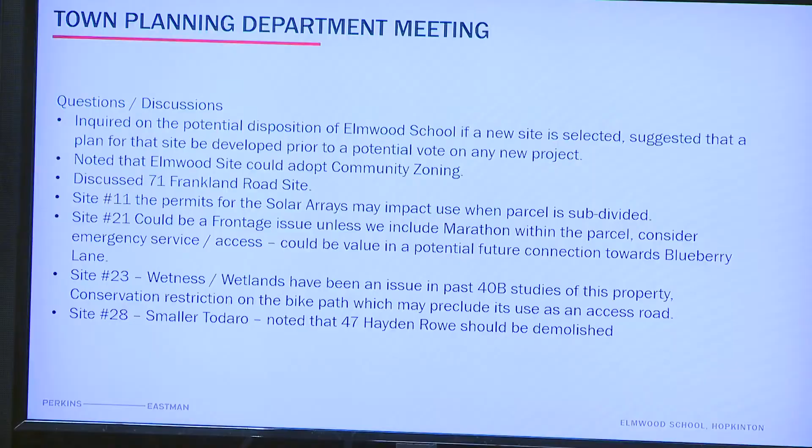Solar and sustainability, you can see efficiency and environment were the leaders in that particular exercise. That was really great feedback. I think it was well done, and we hope to continue that discussion as we move forward.

We also met with town planning.

Dan, sorry, before we move on. Sure, I just want to give the rest of the committee an opportunity if anybody has any comments or thoughts on what Dan just presented, or on the community forum in general, for those who were able to attend or view it.

Yeah, I'm curious, do we know how many people watched afterward or were viewing at the time? I think the number we got for viewing live was about 30. I don't think we have the numbers yet on how many have watched it subsequent to that.

I don't know, we probably have to ask our friends at HCAM if that's data we can easily pull, but that's certainly something we'll want to take a look at. That's a good point. There was also another 30 or so people in the audience too, beyond the group here. Thanks.

I think it raises a question probably worth considering, which is 60 is an improvement from our community kickoff, but certainly still not high engagement numbers. So I would also ask members of the committee if, A, we think there's anything we should be doing that we're not doing that could increase that engagement, or do we potentially think this is just where the community is at this point and hasn't really connected to this project yet. We're always concerned about keeping the community engaged, but short of going to people's doors and providing them the information, I'm not sure if there's anything else we should be doing here.

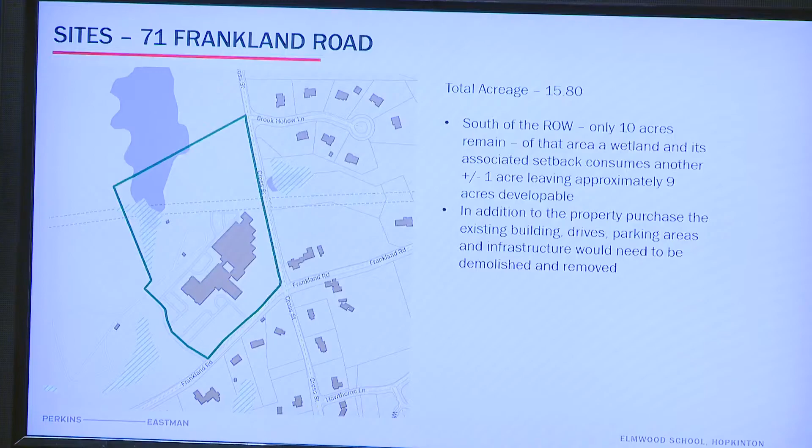In addition, the other condition on this property is that after a purchase, the existing buildings, drives, and all the infrastructure would have to be removed at an additional cost above and beyond the purchase of the property itself.

So that's just a rundown of this piece of property and at least what we see from it right off the bat. Any questions on that, or on the town planning department meeting?

For context, the town planning department meeting was one that Mr. Kamalo asked us to have. The general purpose is just to make sure we have ongoing communication with the various members of the town planning department, the conservation department, and DPW, to make sure they're brought along in the process. So it was good to make those connections.

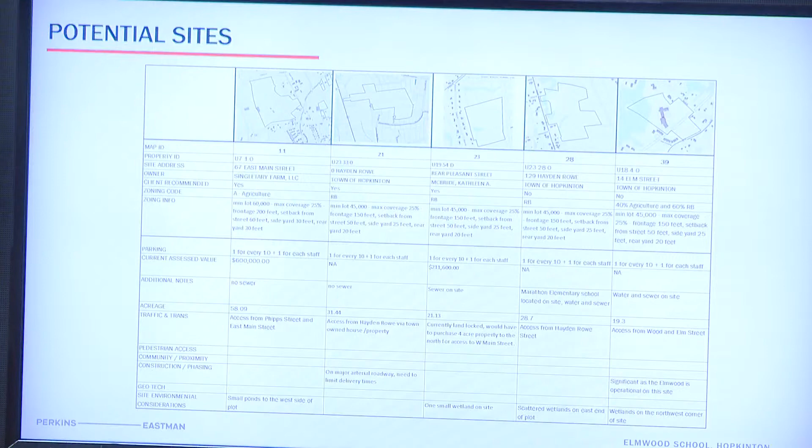Sure. You're all familiar with this slide, showing where those sites are located within the community, the ones remaining, the 5 that remain, and here are those 5. Again, to remind everybody: the 67 East Main, the Hayden Rowe sites, the rear Pleasant Street site, and the Elmwood site.

I guess we're skipping this for now, right? Yeah, these are just recaps from our last meeting, and also the community forum where we presented the criteria to you and to the public, and then the idea of putting it into a matrix here. But yeah, we can come back to this as well.

So I can start with each one of the test fits. We have to start with a program, and the program will evolve throughout the feasibility study, through the 2 initial submissions to the MSBA. So what we've done here is list, in very simple form, the existing gross square footage, as well as, using the MSBA's template, the gross square footage of a grade 2-3 school with projected enrollments, and for a grade 2-3-4 school.

We did the same exercise for site program. We had some initial meetings with staff, facilities, and PE health and wellness instructors to put together what would be the initial targets for parking, car queue, bus queue, and play space. It's not an exact science, but basically we needed to start with a comparable program, keeping it consistent, to create the options and vet them.

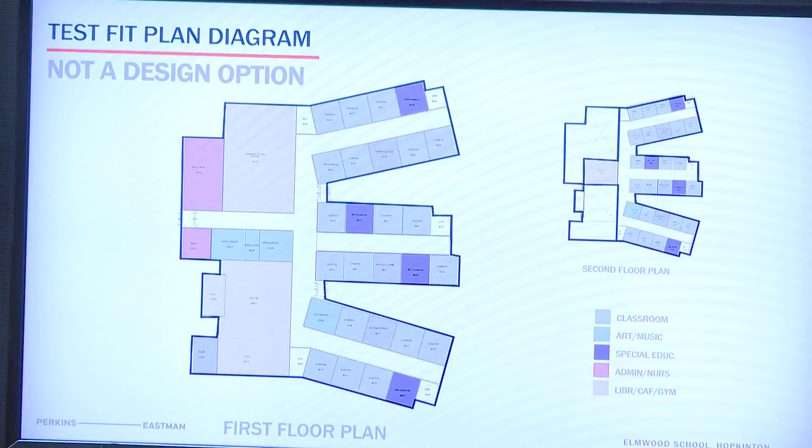So in this plan you're looking at, you'll see it's used for both the grade 2-3 and the grade 2-3-4 option. The difference would be, for the sake of testing, it would be a 2-story plan for the grade 2-3, and then an additional 3rd floor would be added for the grade 2-3-4. You'll also see on the test fit site plans that some of the major spaces at the ground level, the gymnasium and cafeteria, would also get a bit larger. But for the most part, it's pretty much a very similar diagram.

So I think we can go into those test fits. You've seen all these before, but there's a couple of things we did from the last iteration to this one. One was decoupling them, so now there are separate versions of the 2-3 and the 2-3-4, so you can start to see the differences in the parking area and the other areas around the building and how that affects it, rather than seeing the max size like before.

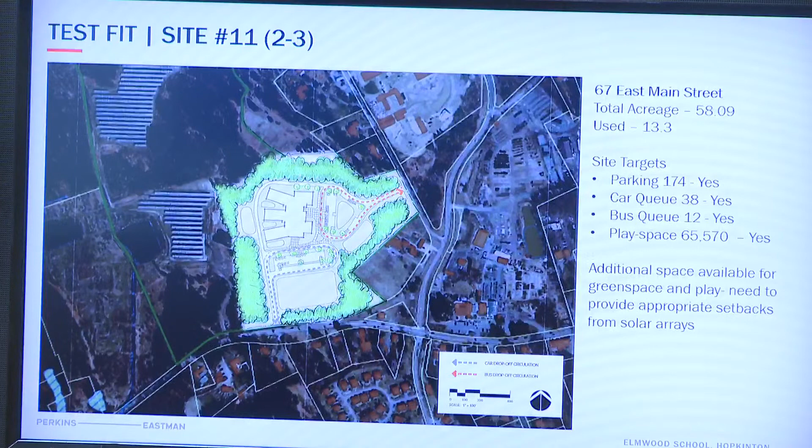The other things we've added are the drop-off for the cars and the drop-off for the buses, so you can see how we envision those happening on each one of the sites at this point during a test fit. So this is the 67 East Main, the 2-3 version.

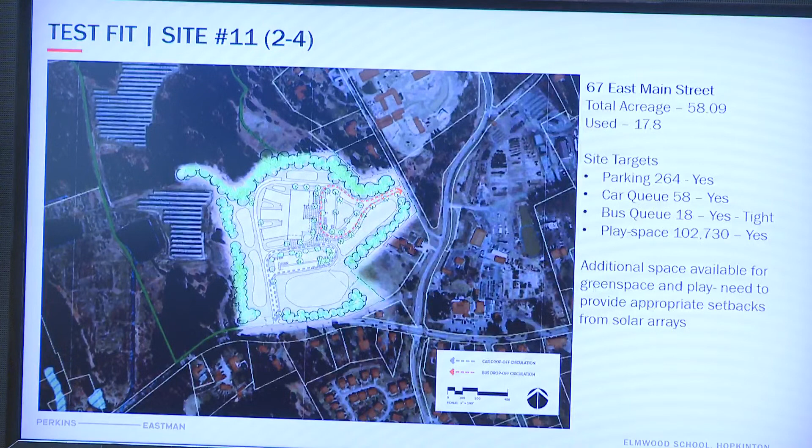It meets all the criteria, total acreage of 58.09. We're using 13.3, so it does meet all the criteria for a 2-3. It also meets all the criteria for a 2-4 configuration, using more acreage, going from 13.3 to 17.8.

There may be additional space, but we have to provide appropriate setbacks from the solar arrays and any other issues that come along with the solar arrays.

John, did you want to inform the committee about the outreach that's been done so far? So, yeah, I would defer to Mr. Shepherd, because I know you did some of the outreach to the property owners of the sites under consideration that are privately owned. So if you want to provide.

This particular site belongs to Mrs. Mezet. I talked to her probably last Thursday just to make her aware that we were considering or looking at the site. This is part of the former Weston Nurseries project and belonged to one of the two brothers. They subdivided the site for the solar array, as you can see, probably 2 or 3 years ago. She's groomed this particular site. If you look at it from 135, it looks like Weston Nurseries. The grass is cut, everything is perfect. I'm not so sure she'd be really amenable to letting it go, but I wanted to let her know we were talking about it, and she thanked me. I told her that should we go any further, if anybody wants to walk the site, we'd talk to her first, and she was fine.

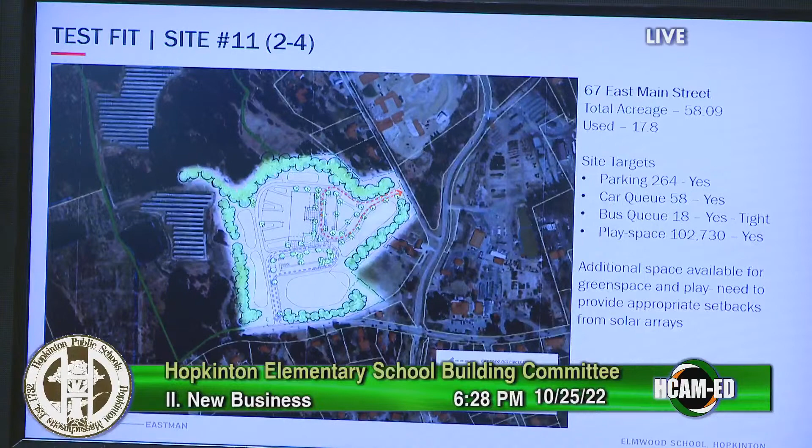In terms of the others, I also reached out to the lady that owns the site down on West Main Street. She owns that considerable piece of acreage behind Whalen Road, and also a lot that goes out to West Main Street, which we use for access. I told her again that we were looking at it, and she volunteered that she had a local surveyor looking at it for potential subdivision. She just wanted to let me know. I told her the same thing, that we'd keep in touch with her if it looked like something we wanted to do. There's a considerable amount of wetland on that site, as you probably found out.

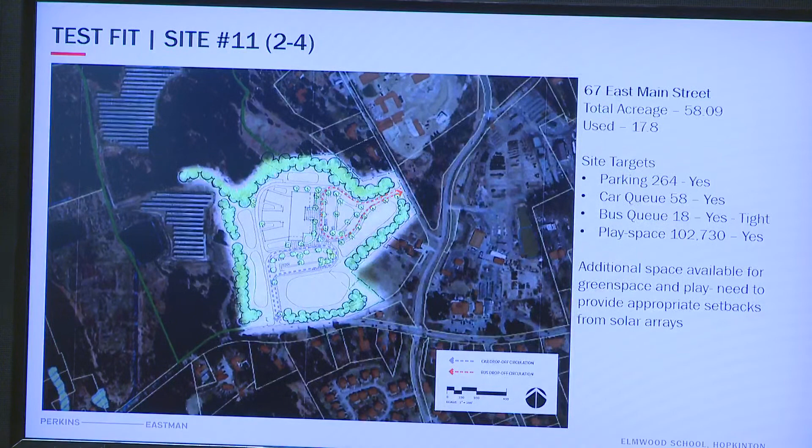But then the other two I spoke with, because we talked about it briefly, were the two private property owners on Elm Street and Wood Street on the corner. Mrs. Richardson has the big old farmhouse you can see when you turn the corner, and the gentleman just put up that nice new white fence, and he said, 'Does that mean I gotta get rid of my white fence now?' I said, 'No, it just means we're talking about the possibility. Don't be alarmed.' Both of them took it the same way. They were very gracious, and they wanted to make sure we kept them informed. That was pretty much it. A couple of them were harder to get to than others, but somehow we managed.

Thank you. Any questions about that?

Did anyone show unwillingness from the beginning? No, wasn't anything like that. I told her we were a long way from having that discussion. I offered that the town does own land because they're paying for it in their taxes up on Hayden Rowe Street, and they said, 'Yep, I'm aware of that, where the Marathon School is.' And this is just one of the options we're looking at. None of them said, 'Don't bother me, don't call again.' That's something, that's good. Mike, you're the perfect person for that job, by the way. I don't know if it fell on your shoulders on purpose or on accident, but whatever it is, you're perfect for it. But no, it went fine.

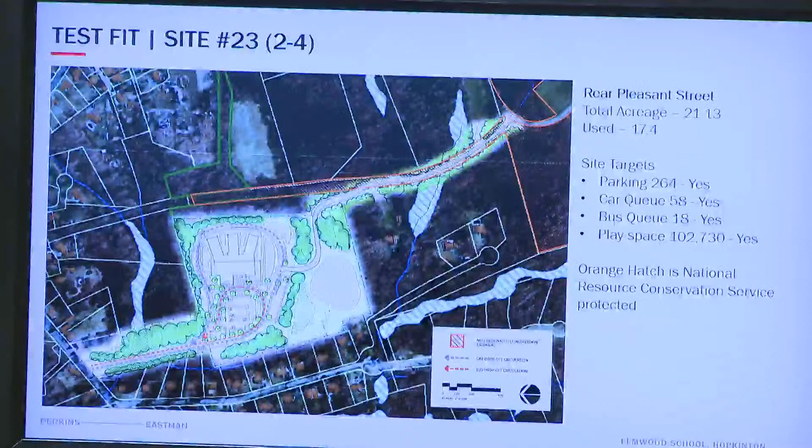And in this case, correct me if I'm wrong, but on the one side it's hitting West Main Street, right? Bottom of West Main Street, right near before the light. Whalen Road, no light, Whalen Road's on the left. That's these houses right here. This is the bottom of West Main Street. And she owns this big acreage, but she also owns this frontage lot that comes out to West Main Street. So that's how it could be accessed.

Another disadvantage, I think, would be that it fronts like 17 single-family homes, so you've got 17 enemies already to start with. Unless they have kids going there, then it's easy for them to walk. I was more considering on the map where it seems like it's very close to the 135 turnoff. Yeah, it is, it's close, at the bottom of the hill. When you start talking about early morning traffic, that's going to delay considerably kids being able to come in and out of the space.

In this updated test fit, do we meet the play target? Originally we did not meet the play target space that we wanted in the first test fit. It does meet it now, okay. It just has these other issues.

It meets it with having to cross the wetlands. Right, and what would that mean, literally? Would there be a path or a bridge? I haven't walked the site, I don't know how wet this site is. There could be a bridge that would need to be built over it in order to cross it; oftentimes conservation commissions do require you to build a bridge with limited pilings or touches.

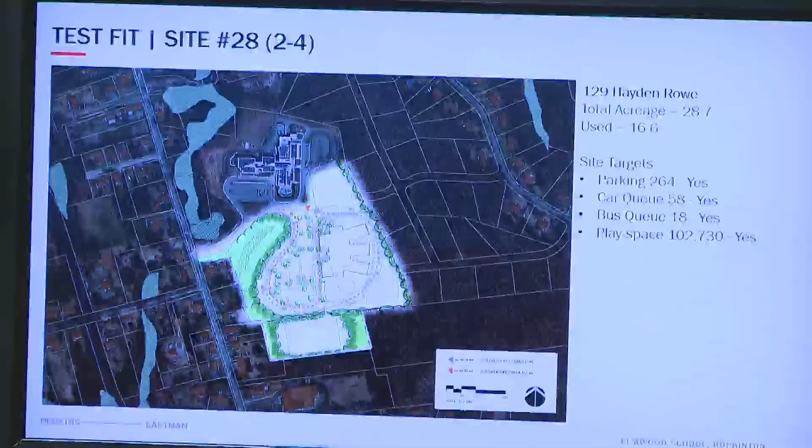So the sort of advantage, if you will, which I'm not sure is a positive or negative, to that one is the town retains more of that zero Hayden Rowe land to potentially use for something else. The downside, as you're pointing out, is it potentially restricts anything that happens between those two schools from a growth perspective. Could I add, though, we're using 16 of the 28 acre available acreage on this lot.

So the remaining 12 acres or whatever it is, roughly, is still town-owned land. So if we needed to expand for field space or playground space, we wouldn't be stealing from Marathon necessarily because we do have 12 more acres potentially to work with, or am I wrong about that?

129 is Marathon, correct me if I'm wrong. Yes, that's correct. So this is using the remaining acreage of that whole lot. 129 Hayden Rowe is Marathon now plus Elmwood, with 28 total available acreage, including what Marathon already sits on. Correct.

But in terms of town-owned land, how much of zero Hayden Rowe does this use? Because you said you're jutting into that one field. It's only using about 3 acres at the bottom of that field. So 3 acres, and leaving how much on zero Hayden Rowe?

I'd have to go back to the total available. Is that what you're worried about? We still have something left. Total acreage 28-ish, about 28 acres left if you use about 3. Now, the difference, I'll just say...

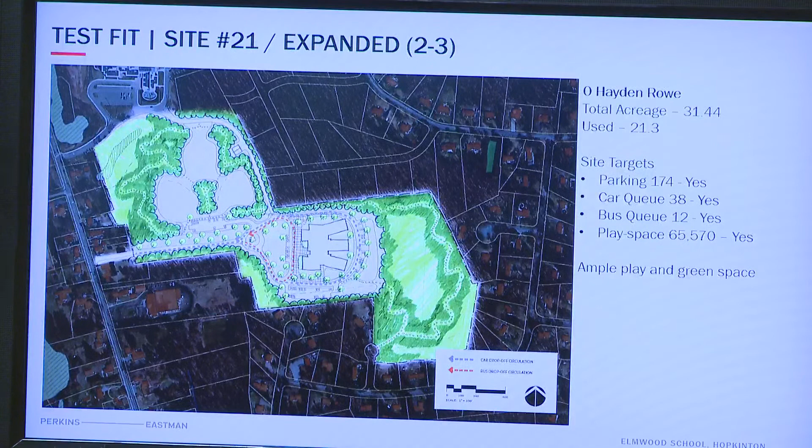No, I think this is excellent feedback, the design team can work through. As Dan noted, we're starting to eliminate the idea of the parcel separation. I think there's an ability for a modified version of this option to float the proposed site further away from Marathon to preserve that. The fields could be spaced closer to Marathon, for example. It's almost like a hybrid of this idea, using more of the space.

Would it make sense in any further design where you'd have mixed use of fields for both schools, putting fields in between them instead of south of the potential new school? Was that looked at? That is what's happening on this expanded version. Those three items there are multi-use fields between the two schools. That was the idea here.

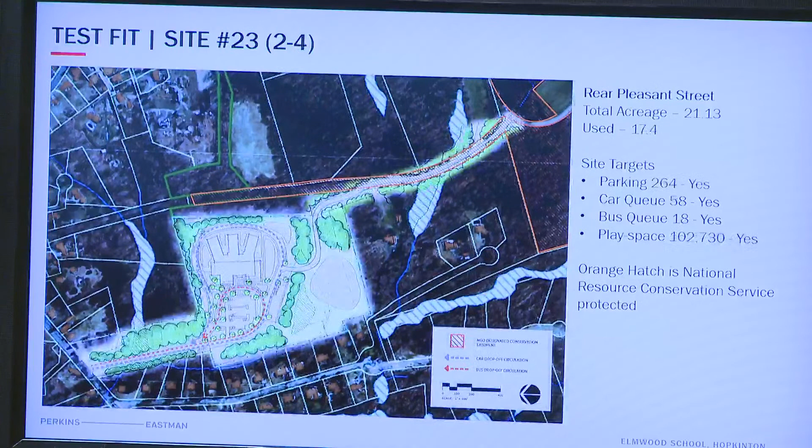You could slide the building down and then flip the field over, so the field would be in between the two schools. But it looks like it's substantially larger, taking up the entire area where the other one is. Is the purpose that Marathon could potentially use that as well? That was the idea, that they would be shared use between the two.

It seems to me that site 21 expanded 2 to 4 uses a different means of egress off of Hayden Rowe. A town owns a house there, which isn't worth anything now, but potentially for this school you could have two means of getting in and out - buses on one, parents on another - maybe helping the traffic a little bit. It raises that potential anyway, with buses going in one way and parents going in the other.

There's always the potential, and that lot's like 90 feet wide - it isn't a big frontage lot. I think it was pretty tight, basically the road in. It'd be tight just to get a roadway in there, but it wouldn't be anything like we have going to Marathon.

The reason we made Marathon so big was because of this potential - we knew that when we did it. The Marathon Road leading into here could be used as a queue as well, it could go right around and come back in. This one could go back out. This gives you the best option of getting the queue off Hayden Rowe, combining the access of all the parcels.

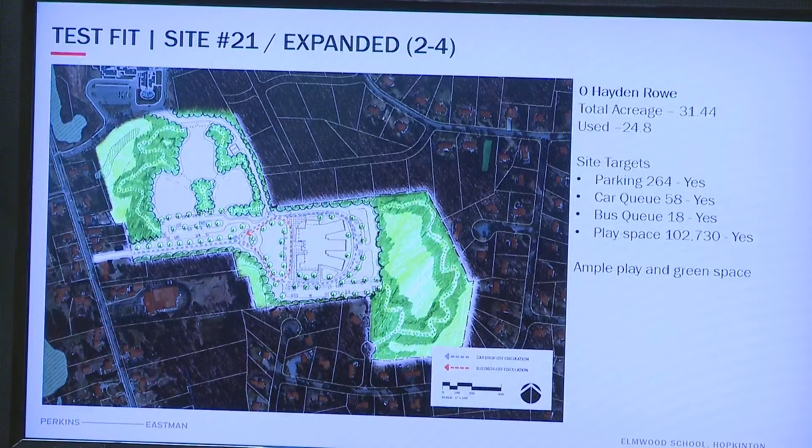You're talking about 21 expanded, correct? Correct, yeah, that's it - this one, which has that second road, the extra road coming out. We can certainly look at something in between these, an option that captures that road, pushes everything over, puts the fields in between, but leaves more of the property undeveloped in the back as a third test here.

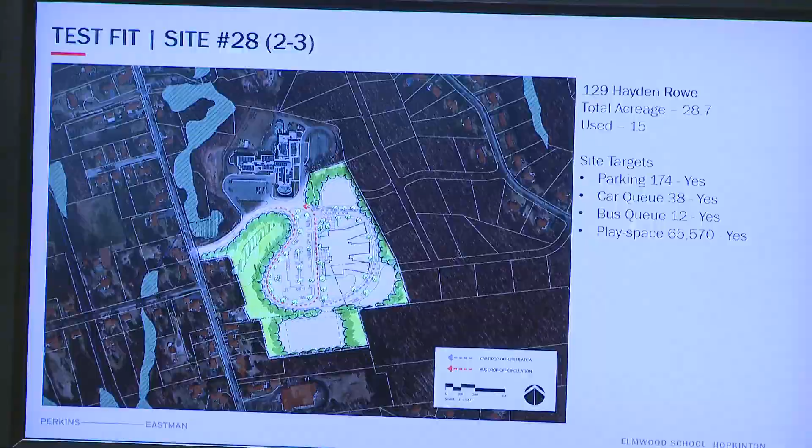Does it make sense for us to keep 129 on there to continue to explore, if our fear is that we're going to build them too tight together? Does it have to be that distinct? Or are we saying take that plot and figure out a number of different options that might be workable to balance those things?

Yeah, I think that is - as a town, you can redraw your lines to suit the needs of the project. So I think keeping the blank canvas open, temporarily erasing those lines to find an optimal solution makes sense. Perkins can do several iterations of that and bring it back as you hone in on the best placement for the building, then fill around it with the parking and the fields.

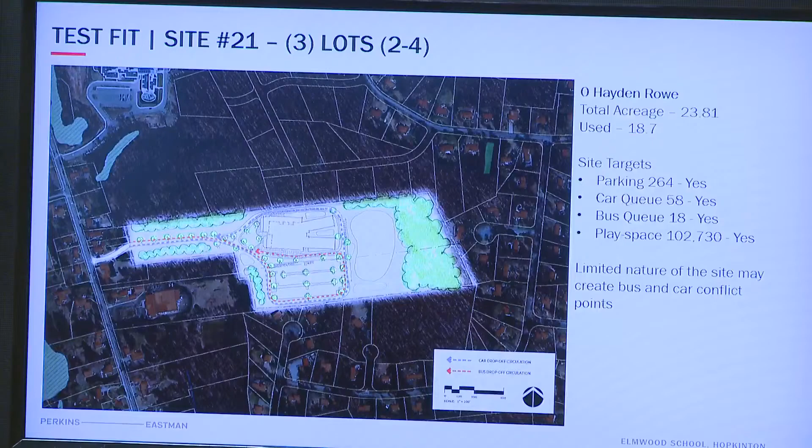Hopefully based on the feedback here, you can see what some of those levers are and come up with some. I think this one, site 21, the 3-lot one, we're not going to continue with. It seems like we should combine this into one site called just Hayden Rowe, and drop the other iterations.

Going back, thinking about the fields and potential play areas, is there any limitation on what type of fields you could build? Do they have to be age appropriate for the school age you're building? I'm thinking in the future, would you be able to build larger fields, like a larger soccer field, that could be used by other age groups on that site?

Or do you have to build something that's age appropriate, size-wise? Are you limited? I don't think you're limited. You would be able to build whatever you think is appropriate for that site. If they're looking for a multi-purpose field, I think that's what they want, a full-size field, and I don't think there's any desire for something smaller. I think if you decided it was a full-size field, that would be fine.

What we did here, talking with the physical education, health and wellness folks, was look at a certain number of classes that need to be out using fields. They don't have an exact size, but there really needs to be zones for PE, for play. I think the things I get concerned by is, like I said, the construction.

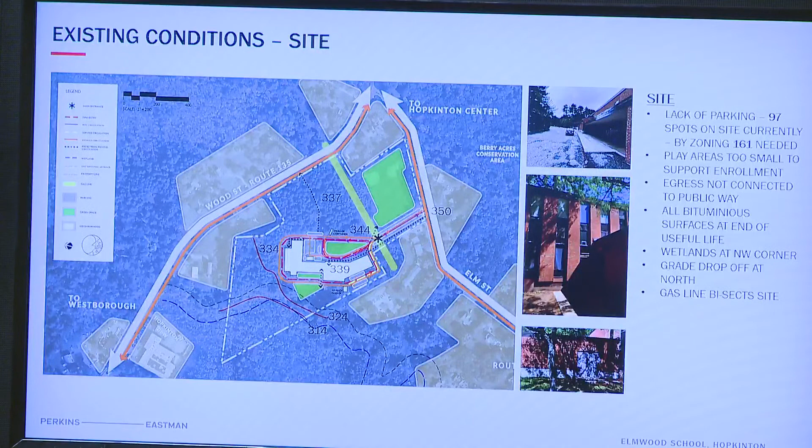I think in one of our slides from maybe the last meeting, hold on, there's about 25,000 square feet of play area back there, it's that green triangle. What Perkins Eastman has recommended is 65,000 as a minimum. So the kids don't have much room, and when we were talking about fields earlier, the reason why we just have open green spaces for kids to run and play different games. And that's the opportunity that they really lose at Elmwood right now.

And what is the assumption, if this were to go forward, what is the assumption that happens to existing Elmwood? I see it here in red. Is it, oh, you mean in these versions? I think the assumption would be the building would be demolished.

Demolished, yeah, I assume that would be the case. But also, if you went to a 3-story configuration—I know this is just a graphic thing we're looking at—in terms of getting the square footage in, it cuts down the footprint of where potentially the new school would go. You'd have the potential of another access off of Wood Street, which can't hurt in terms of traffic flow. And if the existing school goes away, you've got all the play area you'd ever want.

That's what I was asking. It meets the goal. Parking for the new school could be out part of this ball field. I'm kind of reluctant to go after a couple of neighbors to sell their house to make our situation better. It's just fraught with all kinds of hate and discontent, which I don't want to deal with, if we could figure out another way.

I've asked this several times—these kids are, say, second grade to fourth grade. Can they do a 3-story school? We've got elevators, we've got stairs. Is that unheard of, 3 stories? No. Well, that would cut down the footprint, would it not? That would help us. It should.

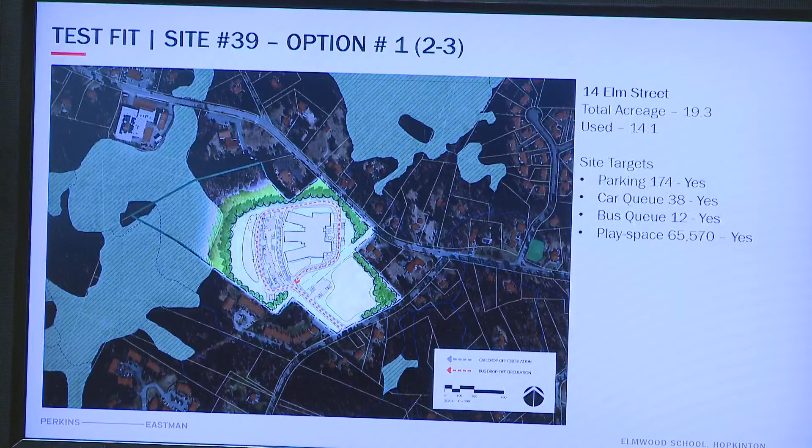And there's an elevator anyway, we know that, at least one. So, except for the teachers having to hike up there once in a while, I don't see a problem with it. I think energy-wise, it's gotta be cheaper to run, there's less roof to leak, there's a lot of good things about going taller rather than bigger.

Less footprint gives us more of the space we want for the gardening and the athletics and all the good stuff. We can certainly do that and have another test fit to see what that looks like. I think it might make sense to also start a phasing idea here to see what that could look like too. It can't hurt, I don't think.

To be fair, at least from my point of view, if we didn't have to look at this, I would already be pushing against it. I don't like the idea - generations is a weird word to use here, but Elmwood is only 2 years. That means we're gonna have a whole set of children who never see green space at all if we go with this. There's gonna be, I don't know how many years of children who will be going through Elmwood for their 2-year stints and never ever really have anywhere to play outside.

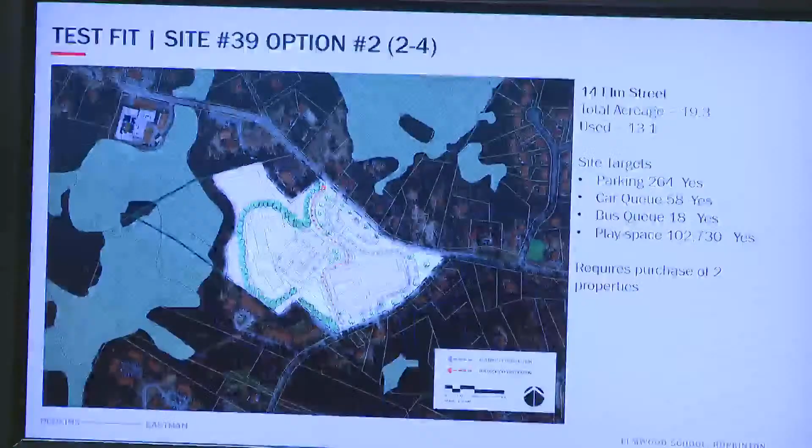And one of them would be my granddaughter. So to me, that's a huge consideration. If this was kind of a traditional K through 5, I probably wouldn't be as concerned, but the idea that the whole time these children are in this school.

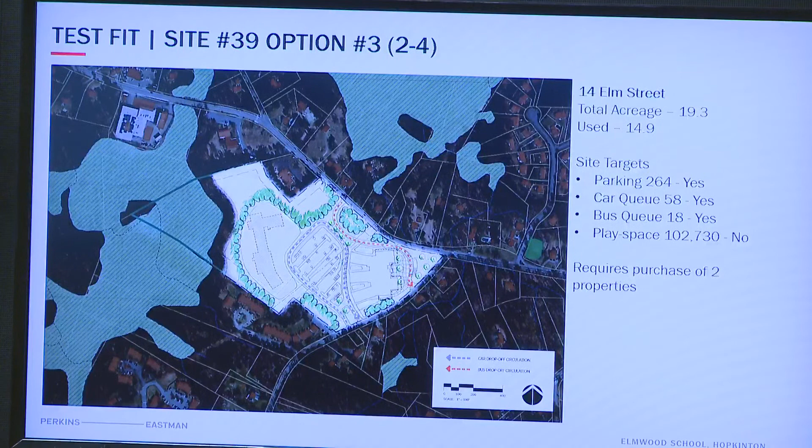I agree. If we can possibly get around the traffic thing in some kind of reasonable way, I think our solution is much easier. So, I think while it's a requirement for us to look at this, I agree with what you're saying, Leah. I think the nice thing about us having to look at it though is we're going to be able to go to the town with that story, right?

We looked at what would be involved in actually doing a new construction, and here are all the implications, including these children who would go through that school and never see green space or go to school for 2 years on a construction site. And I think the fact that we will have done the full due diligence will make it easier to get whatever solution we arrive at passed by the town.

But all these kids will also be interesting contractors in the future. What's interesting too is these are the same students who are gonna live through the Marathon wing construction. Like the wing that's being built at Marathon, they're gonna have the construction of that wing, and then they go to Elmwood and get 2 more years of it. So they're gonna be used to the jackhammering and everything else that goes on.

But if we can sequence it, can we do Hopkins when they're there too? Let's just keep moving it along and see how many - probably would. Well, there'll be a whole crew of teachers who are going to develop nervous habits from their children that have all this energy that hasn't been spent on the playground, and then there'll be this mass departure of second and third grade teachers for a couple years. It's going to be tricky, so yeah, keep that in mind too. The kids need to expend some energy during it.

And part of me thinks, you know, when we had Marathon, you all had the forethought to have a place where it could expand, right? So that was part of the architecture and the design, that there will be this place where you can build the wing, and there's plenty of space for it, and the whole site is built around that idea. So when I think about that, I'm like, would we want that for Elmwood as well, for like the new Elmwood school?

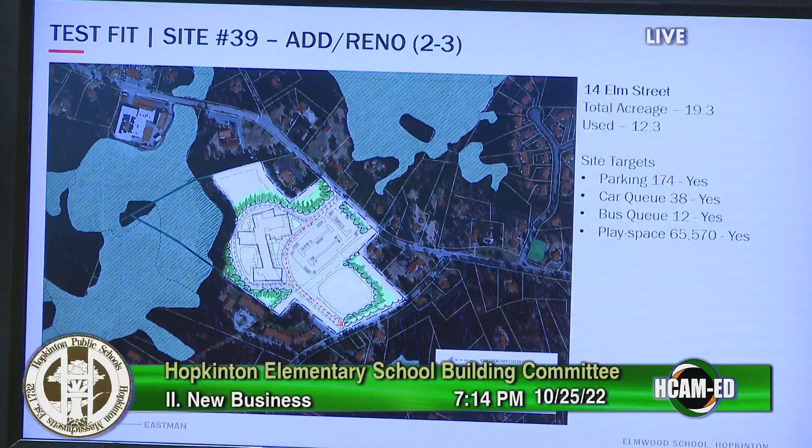So I think we were gonna look at the Add/Reno designs, and then we'll talk about site selection criteria and what the next steps are. Then we'll go back to the site selection criteria.

So this next slide shows the Add/Reno, or at least the test fit for the Add/Reno on the site. This is one of the two versions that we'll walk you through as far as the plan. It does meet the criteria, it uses up a substantial part of the acreage to do so, but it does meet it.

So what we're looking at here, there actually are dotted lines, I'm not sure if you can see them, where there's demolition. This is the existing Elmwood School, and there's a bold line around new construction. What this shows is basically a new 2-story, 16 classroom wing. It's at an angle in the back. It also has a new gymnasium to the lower right, and it repurposes the existing gymnasium for a cafeteria, building a new stage within it. It demolishes the modulars, or removes the modulars, and demolishes what is affectionately known as the book room, kind of on the back where the new addition is.

We looked at this as, I guess, somewhat minimal demolition to try to look at what spaces we could reuse. Classrooms, as you know, are reasonably sized, but in this plan, what we see is it basically accommodates the grade 2-3 configuration, but does not accommodate the 2-3-4. There isn't enough room. We'd have to turn that new addition into 4 stories or more and increase it in length.

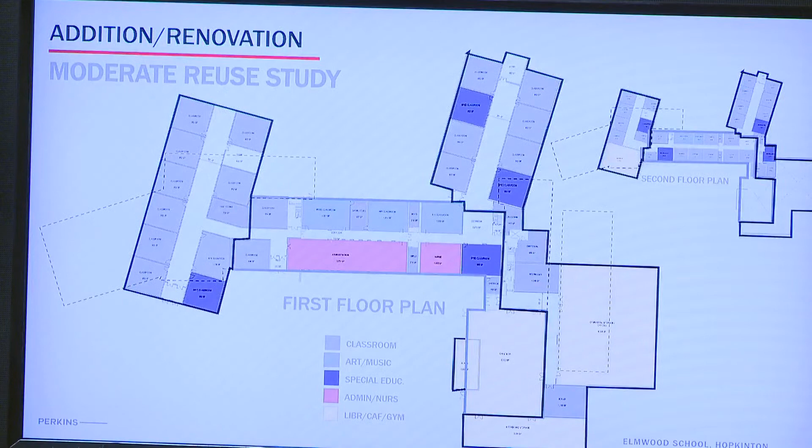The reason I was asking is because if those wings are disconnected and we're talking about 3 floors, I would assume with ADA stuff that means an elevator or something has to be added into those wings. And if they're not connected, that means 2 separate lifts.

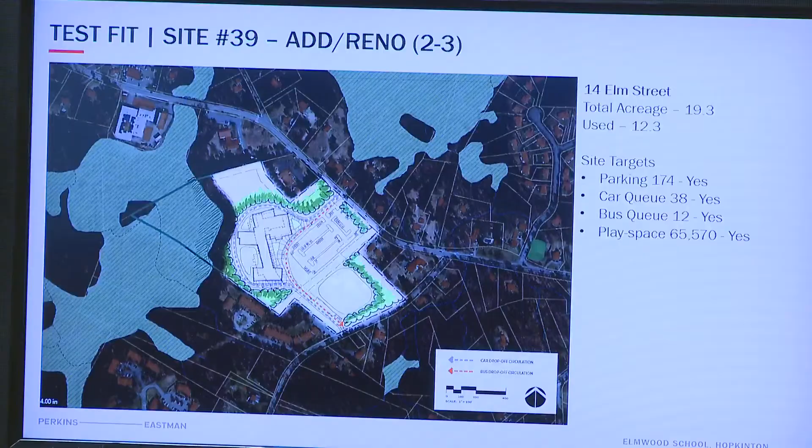Not to reopen the conversation, but this says ad reno does meet play space, bus queue, car queue, site targets. Without going into another 20-minute conversation, how? Well, basically that entire forest is being wiped out. That's how it happens. All this area is undeveloped right now. We would be ending up developing all of that to get there.

I think what would be the best of both worlds, given the site constraints, is if you keep the current gymnasium, convert it to a cafeteria, build that kitchen space at the bottom, and build a new gymnasium, knock down the rest of the school, make this part of the new school. That way the people that want to keep the Elmwood School get something, and you're going to need those things in the new school anyway. You're going to need a cafeteria, you're going to need a gymnasium, so why not keep that piece of the school, arguably the newest part, add to it for the gymnasium, and make it part of the new school, that footprint we keep talking about. And then the rest of it goes away.

Of course, you'd still have the problem with the kids and construction. So I would only be retaining just the gymnasium, basically, and only the shell, because it's converting into a cafeteria. But the big political thing is, yeah, we're trying to save the best part of the school, we're saving it. We're not going to build another cafeteria.

I'll just throw it out there, you gotta have a cafeteria, you got one already, just gotta convert it. But just something to think about, someone will ask that question. So we're happy to look at that. I think one of the things we anticipate in doing that is to phase it and not demolish the existing wing. It's really not clean, it's reaching to connect, but I know it's not clean.

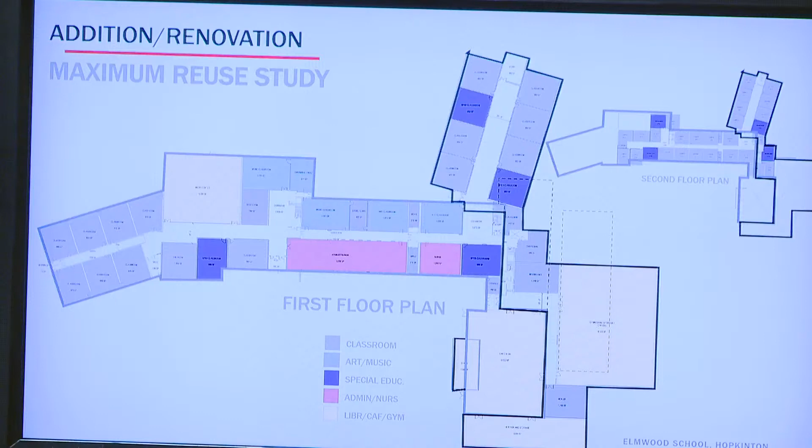At least we'll consider that. In the ad reno options, this includes new HVAC systems, so this would be everything, all air conditioned, everything still. You'll find that the cost for the building itself will be similar because you're bringing all new, and all you're saving is pieces of the skeleton, essentially, because to get to the new energy code you're reskinning the whole building, reskinning the roof, and replacing all the systems, so it'll end up close in cost proximity. You'd have to get creative in the existing building too, because those ceilings are low and there's no plenum in between. You can be very creative in there, so sometimes these end up costing as much, if not slightly more, because of some of the things you need to do in order to work around the existing configurations.

I think the Runkle School was 9'10" floor to floor, something like that. The Runkle School, I think, was 9'10" floor to floor. It was really tough. Yeah, that gives you enough space. It's worse.

So, did you get the feedback you needed tonight to come back next time? Yep. So do you want to discuss the site selection process and then we'll talk about trails? Sure.

At our last meeting, we discussed the criteria that was established, and we presented that at your last meeting, as well as the community forum, and solicited feedback. The project team will help provide the data for you to do your analysis in the January, February timeframe. After we're through our December shortlist, we'll be narrowing in on the remaining options, and that's the point at which we'll start to build the data that will fill in the construction schedule, duration, sustainability, construction impacts to the neighbors and students, traffic, parking and on-site circulation, permitting, school future growth and flexibility, which we hear is very important in this town, and certainly operations to the district, including busing, and then public safety considerations, site complexities, walkability and bikeability, and proximity to utilities and services are the criteria we've talked about as the initial list.